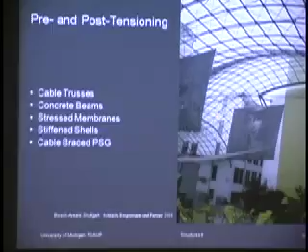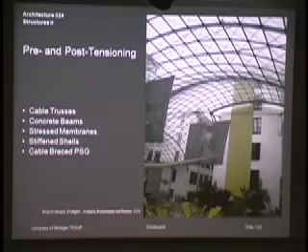This is the Bosch Areal in Stuttgart. The Areal is actually the buildings around it, which was Bosch's first headquarters, first workshop, and now it's kind of swanky apartment buildings, I think. But this thing here, which I've got a couple of slides of later, is stiffened by these spokes, these tensions - it's being pulled in tension here downward. It's a compression structure basically, but it's being stiffened by being pulled into additional compression.

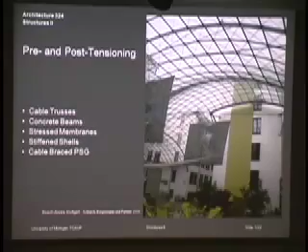Interestingly enough. Anyway, we'll talk about that in the course of things, but first let's look at cable trusses.

And you can see—here, turn the lights back on. We will demonstrate here. I mean, you can pretty much imagine how it works, but we will show you if we can. Okay, you hold that. All right, got that one, got this one. This is the concept right here, which we will now lift free of the chair.

If you have that thing, and the beam would deflect under whatever loading's on it, you can counteract that load by putting a support. It's kind of like a flying mast or something, a support in the middle, and you can tension this cable.

See, I am tensioning it. Whoa, that's a bit overdone. But you can see, I can bring it dead level if I want, or you can balance it so that there's no moment in the center.

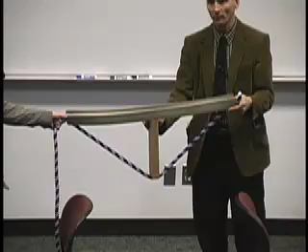Essentially, this becomes a support out in the middle, but it's a support held up by the cable, which then again ties back into the beam. Now, this would normally attach to the beam. So by doing this, it's pulling back—this force in the cable is held by the beam itself.

It's not like it's another thing out here. I guess you could do it that way, but that's not how it's done—it's held by the beam. So that means the beam has some flexure in it. It also has this axial force from this cable, because the cable is pulling on it.

And where that attaches—the way we've got it now, it attaches pretty much in the center. In this example he's got, it attaches in the center, but it might not attach in the center. It could attach, say, at the bottom edge.

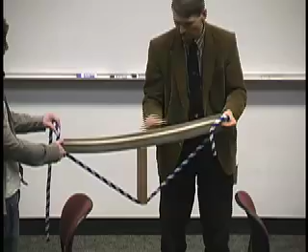If we had—whoa, this would be tricky. Let's see if we can flip it up. Hey, come up here, Ryan. Flip the beam up on edge on the strong axis. Rotate. There we go, great. Okay, now say it were like that.

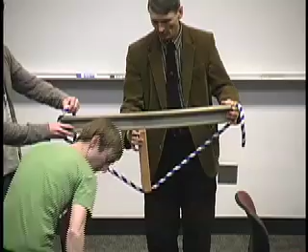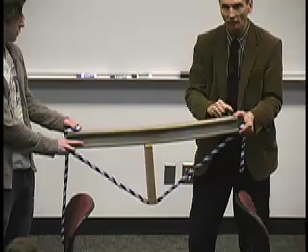Now, this is a little trickier, isn't it? I knew there was a reason I did it the other way. If you attached it at the bottom edge here, you'd not be at the centroid of this beam, which would mean just the cable itself would be putting a twist onto the end of it.

It would be just like what we looked at with the eccentric load business—it would be an eccentric load. That cable would be loading it like this, and as you tension it, it would be putting a bow into it, so you could get an extra effect like that.

If you're trying to bow it upward against gravity, you could attach it to the bottom edge, not at the centroid, and that would bow it up. Plus you've got the piece in the middle pushing it up, and then you also have the axial force acting on these forces.

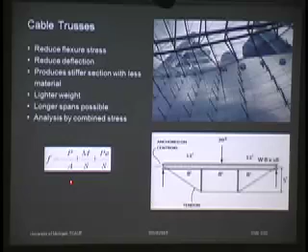These forces add up with a superposition equation like this, similar to what we did before, which is why this is all combined in the same chapter. You've got an axial component, P over A, negative for compression. Then you've got the flexure component, which might come from something like that, or a point load. Then you've also got an eccentricity.

Here this would be zero because it's attached at the centroid, but if there were an eccentric attachment, then you'd have an additional moment for that. So you add these stresses up, and you can find the total stress.

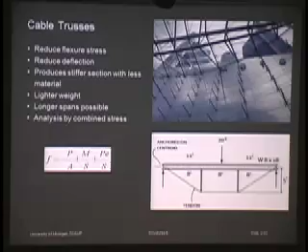But the interesting part of the whole system is that you can use this to balance. You can either balance out the deflections, have zero deflection up here, or have a zero moment up there, depending how you want to solve it, by tensioning that cable. Let's see, there's probably an example of this with a few numbers.

This is an example out of the book, that same one where you've got a beam. It's got a couple of verticals, the cable on the bottom. This one's attached at the centroidal axis, so it doesn't have any eccentric moment.

The idea is you have a moment caused by the load, and you're going to balance it by these sticks, so that at the center line it'll have zero moment. Now, if there were just one stick, a one-point load and one stick against it, you could imagine bringing the whole beam to zero moment, if you weren't worried about the dead load.

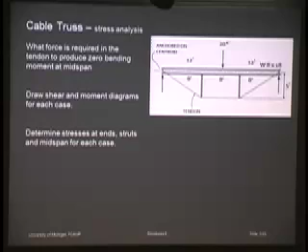But in this case that's not quite going to work, because you have two supports. So depending on what the cable force is here, you can do different things. You could get the moment to be zero at this point or this point, or you could try to get zero deflection. You could solve it for different criteria just by how much you pull on that cable. The question then is how much do you want to pull on the cable, and in this case, I think the problem works through with zero moment.

So if you're after balancing this moment, first you want to figure out what the moment is. You look at a free body diagram just of the beam itself with the cable removed, no cable on there. That shows you, okay, PL over 4, 120 kip feet.

That's what the moment is from this load. Now you want to balance that center line moment with these forces. With it, you've got a cable force and also these guys. Well, this axial force is just going to cancel out, and you've got these forces, which will be in the diagram something like that, acting on the beam. These are those little stanchions, and this is still the beam.

So what have we got? You've got to find this force first. This is the loading — you assume that's the loading and set it up. There's the moment equation for a third point loading, and you set it equal to this one, which was 120, so you want to balance it. This is at the center line — they're both at the center line. So I'm balancing this loading against that loading so that at the center the moments are balanced.

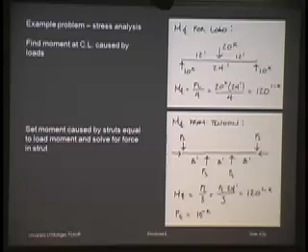This one's 120, going, this would actually be 120 negative, and this is 120 positive, so they add up to zero. If you do that, the only unknown here is this PS, and you can solve that — it comes out as 15. So now you know what the force is. You still don't know what the force is in the cable, but at least you know the force in that little strut, which is a good start, because given that, you can go ahead and figure out the cable force.

You can set up a free body diagram. Here's a piece of the cable, half the cable. So it's got that. This is the little stanchion we just had. There's the 15 kips that we just figured out. So that goes on there.

That would have to balance this one. Those are the only two verticals, right? And these two are the horizontals. So these two have to be the same. Then once you get this one is 15, you can look at this ratio, the slope of the cable.

The cable is treated just like a two-force member, just like way back when we did trusses, were two-force members. There's no moment in them. So since there's no moment, that means the vectors have to add up to a resultant that's exactly in the line of this cable. You can't have it any other way, it's impossible, we talked about this before.

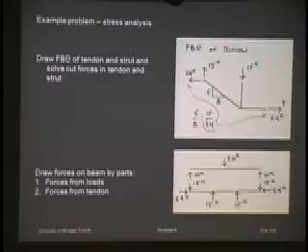Hold that. This is always a little bit, okay, I'm pulling in the direction of my arm. See? All right. My arm is like this. Now, if I tried to pull this way, the cable follows it. Okay, and I go this way. See, the cable is only going to go in the direction I pull it, whatever direction I pull it. It's not like I pull this way and the cable goes down there.

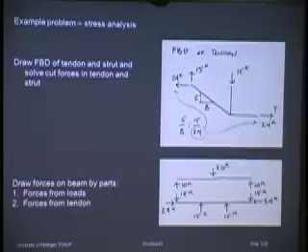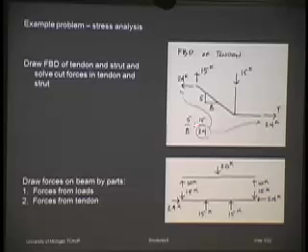No. Anyway, so the sum of these forces has to be exactly in line with that cable. So if this one's 15, and that's proportional to the short edge. This is short and long, so 15 is to 5 -- it's written backwards, 15 is to 5, it's 8 is to 24. So there's the 24. This is 3 times, this is 3 times. So there's the 24, there's the 24 there, and it's also 24 over there.

So now you've got the cable solved. Now you know what this force is in the cable, this horizontal and the vertical. Now you can go back and in this diagram, see we'd left that off, now we can put it on there. So there's the 24. This is the 15 from up here. These are both 15. There's 24.

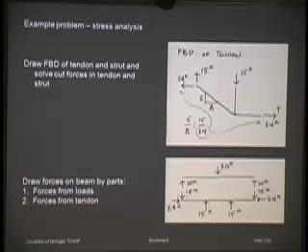Now this is without the cable, right? This is the beam, and this is the beam with the cable. So you sum these two together, and you've got the entire picture, the whole system. So by superposition, you just add those up. You end up with that then. So this is the free body of the beam, the forces on that beam.

Once you have this diagram, you could go ahead and construct a shear and moment diagram just for fun, right? You might as well. This has no effect at all, these 24, on either shear or moment. This is just an axial force. This one has no effect on it. See? It doesn't affect it. How's that supposed to affect it? No, it doesn't affect it.

Sorry, only this one. You start here, 5, goes down 5, goes across nothing, up 15, up, over, down from 20, over, up 15, over, down. So that gives you that. And then you get the areas of those, and you can plot your moment diagram.

That's exactly what we expected, right? That was the whole point. We were trying to get 0 moment. You haven't forgotten the point, I hope. The point was to get 0 moment in the center, but look at this, it didn't get 0 moment over here. Well, shoot. But it's not 120 either. If I hadn't had that cable on there at all, I would have come to 120 in the center, right? Remember? It was 120. So the cable did a lot. I mean, I did get down to 0. You could think, hey, what if you pulled the cable a little bit more?

If I pulled the cable a little bit more... oh, I guess that'd be a bad idea. I think I've got to pull the cable a little bit. If I pull it more, this will go down. But if I pull it less—okay, I pulled it too much already. I let out a little slack. Then I'm going to start getting the moment back in here, and this diagram will go up, I think.

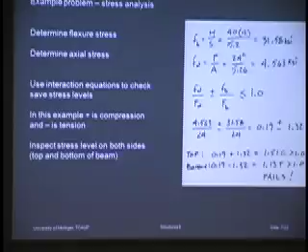This is supposed to take tension—what does it say here? Positive is compression, positive is compression. Okay, this is positive, this is the axial force in compression. Then it's plus or minus. The top edge, positive—that one should be negative, because it's been...

Oh man, yeah, there's things you do sometimes. I was thinking like this, but it's not like that. We crank those things up so it's actually bowing like this, right? With those 40s in the middle, it was dead—it didn't bend, but it has two little bumps there. Put your hand in the middle—it goes like that. Okay.

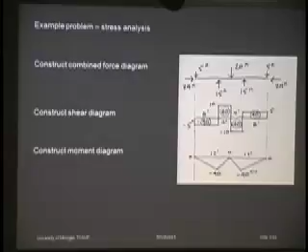So actually, this is... see, that's a... I can't go backwards. It's terrible—oh, there it is. These are negative moments. Go on. These are negative moments. If they're negative moments, that means the thing's bowing up, right? It's bowing up, if it's bowing up, it's tension on the top.

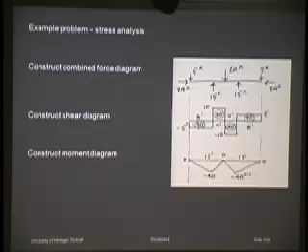Man, okay, well there's another... well, okay, so that's supposed to be a negative. This one on the bottom, it should be in compression, so this one should be a positive. Oh, we'll see, maybe it does work out then. No, it still doesn't work out—these numbers are just flipped. So it fails any case. Yeah, those numbers are backwards. Well, okay, one point off for me.

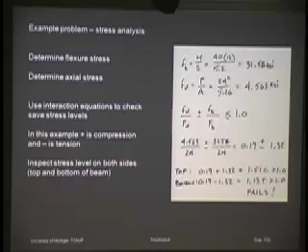All right, so moving right along. The other one counts two points. Oh shoot, yeah, it says two parts. All right, pre-stressed concrete. Well, let's look at this for a second, see if we get this right.

Here is a pre-stressed tendon, probably in the bottom. Usually they're not just straight like that—usually they have a nice parabolic curve in a sleeve or something because they're responding to the shape of the moment. Or in the book, I think he does some that are like a V to a point in the middle—yeah, maybe that might be easier to manufacture like that. At any rate, this one's just straight across at the bottom. If I pull that, if I put a tension on it, and you'd want to do this—I mean, here's a scenario.

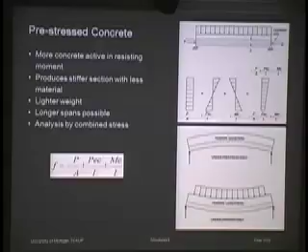You have a mold, a form, and you put this cable in there, and you stretch the bejesus out of it. Then you cast the concrete. But you're still stretching it, don't let go of it. Now you cast the concrete, you still hold it, and eventually the concrete cures and gets hard. Then you let go of it.

Now when you let go of it, the concrete's going to hold it, and it's going to try to contract because it's like a rubber band. It's snapping back, and that's going to pull the concrete with it. So it puts the bottom of the concrete like it's pulling it from the bottom edge, it'll pull it tight like that. So it's going to pull the concrete beam like that.

So initially, in the mold, you should expect it to be, they probably do produce them with a slight camber, so it actually bows up even. But there would definitely be that moment on it, the dead loads on it, of course, but this would tend to arch it up.

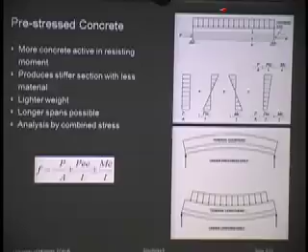Well, let's see, does this make any sense? In addition to that, that's the PE part of it. That's this part, okay. There's also the compression from this part, and then there's a load on it, no doubt, in the opposite direction. So this is arching up.

See if we got the sign right on this. We can blame Shiga if this is wrong. This is compression, right? So this is right. Hey Shiga, good job. This is correct. This is from this moment going upward.

This is also compression on the bottom. So it's compression on the bottom from the axial force. It's compression on the bottom from the arching up, the PE moment. This load up here produces this diagram. This is the moment going downward, so it's sagging like that. So that is tension on the bottom. So you add up compression, compression, and tension, and you end up with something like that.

So it's in compression on the bottom, which would be kind of a nice thing for concrete, don't you think? I mean, if you were concrete, wouldn't you rather be in compression? And here it adds up compression, some tension, and more compression. So hopefully this adds up to compression up here as well. Looks like it probably would. These two would cancel out maybe.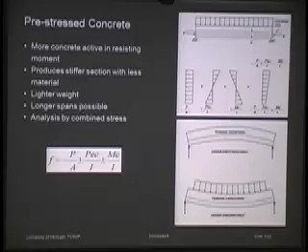And the idea is you can put enough pretension in there that it would reduce the deflection. As a result, with pre-stress beams, you can make them lighter because you're bowing it upward to begin with. It doesn't have to be as heavy to resist the downward moment. Does that make sense? If the beam starts out already bowed up like this, and then I put a load on it, it just kind of comes out level, then I'm kind of back to zero.

So it's almost like I only have to balance this upward and the downward part of it. The result is you can have a lighter section. If you didn't have that pre-stress at all, then you've just got to carry it with the strength of the steel, and the steel would have to start straining before it would pick up load, so it would sag more. So the pre-stressed beams are usually lighter sections.

They're a little bit thinner, less deep, and you design it to meet the deflection criteria in any case, but because they have the pre-stress, they can meet the deflection criteria with less material. So that's the advantage of those. What else would be an advantage?

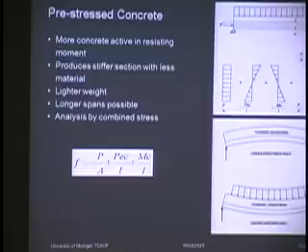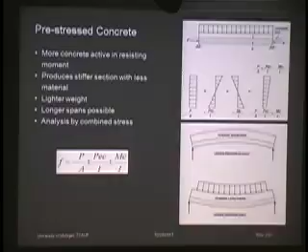Normally with pre-stress, they're factory cast, not cast on site. So the curing is much more tightly controlled - they can be steam cured, for instance. Because you're doing it in a factory setting, you can have a much lower water cement ratio and still be able to place it, so you get a higher strength concrete.

In fact, you almost have to have higher strength concrete to take advantage of the pre-stress. You know concrete does creep - do you know what creep is? It'll shrink under load. It's not exactly shrinking, it shies away from the load, is what creep would be. If I put a load on it, over time, over a long time, it goes like that.

That follows the grade of the concrete. If you have a very low grade concrete, like 2,000 or 3,000 psi, it creeps more. If you have a higher grade concrete, it's stiffer to begin with, denser, and it creeps less. Because if you put the pre-stress on it, or post-tensioning, either one, and the concrete creeps, it relieves the tensioning. Suddenly your bars could go slack if the concrete shrinks enough - that wouldn't be too good. So usually with pre-stress you need a very high strength concrete.

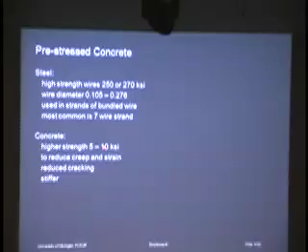Does it say how much? No, it doesn't - oh yeah, it does. Higher strength concrete, 5 to 10 KSI, to reduce the creep. Oh, it does say all this - reduces the creep, cracking, makes it stiffer.

The pre-stressing tendons are super strong. We were looking before - mild steel is 36 KSI, normal reinforcing bars are 60 or 70 KSI. These are 250 or 270 KSI, so they are super stiff bars. You cannot bend them at all.

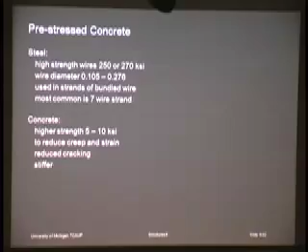You've seen these probably - they're used sometimes to guy telephone poles. The 7-wire strands are a very coarse-looking cable, not a nice woven cable - they're just 7 wires generally twisted together. If you pick one up, say you cut one out of a telephone pole guy, you'll find it's very stiff. It's not like a cable you can just bend around. They are very, very stiff.

They're stiff, of course they're stiff, because, well, not just that, but they are stiff. And in fact they're also very brittle - you can shatter them, I guess, if you bang on them with a hammer or something.

Okay, well, that's enough said about that, don't you think?

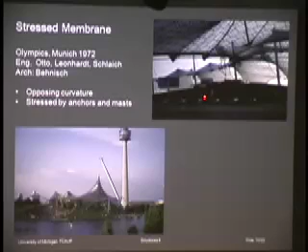Now I thought I'd give you a couple examples of applications of this from some slides - these were old slides I did years ago, not in '72, but not too long after, actually. This is the stadium in Munich, the one that Allianz replaced.

But this was done for the Olympics, and this is a continuous cable that runs along here. Oh, you can't see too well - come on, there we go. This is a continuous cable, and the masts are set behind it that hold it up, and to get the curvature in the net they had to have a point up here. You can see these are flying masts, exactly what we did there, and they run off of the cables. There's a cable that runs down under that saddle and back up.

Let me see if I can find one. They go back up - I think they go up and down again or something, I forget. Anyway, but you don't have to have any masts coming down inside - then it's all free space. So these you can see are tensioned with cables.

This structure was the second big cable net that Otto did. He did the one in Montreal first, which, if you look at pictures of it, is a much lighter weight structure. The reason is the post-tensioning in the Montreal structure was much, much lower, and it was allowed to flex. It was deliberately not designed for snow loads - it was just going to be a temporary, it was a summer expo. And this structure, on the other hand, was indeed designed to carry the snow loads in München.

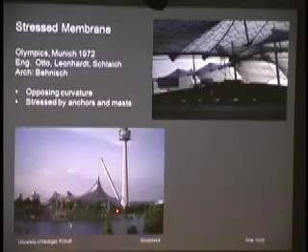But it does have a lot of pre-stress, and you can see it in the details, the size of the cables. I guess it's pretty massive. Where you really see it is down on the ground. Maybe I got some pictures of the ground.

And it's also like an iceberg. I mean, underground there's a bigger piece of it. But the tensioning in those cables is enormous, that wraps around like that to hold it stiff.

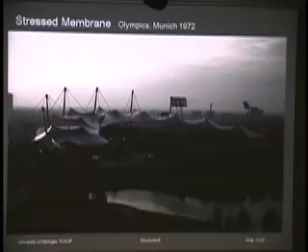Okay, anyway, so what else can we look at? Oh, a couple other quick examples maybe. This is a small glass arch that a friend of mine, Mathias Kutterer, built. I kind of helped him. See, I took these pictures, everybody else was lifting. I said wait, I'll take your picture. Hold that. So they're all holding it.

But the idea is it's got a cable under it. This is similar to those other ones we looked at earlier. And as you pull this in tension, it puts the arch in additional compression, and that stiffens it. I don't really have a good way I could show you that.

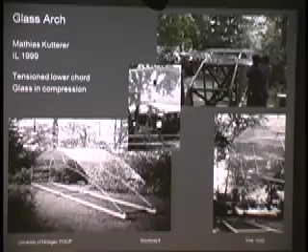But the ideal example, the classic, is a bicycle wheel with spokes. If you took all the spokes out, what would happen? You'd fall on the ground. Well, your wheel would also be kind of wobbly, it wouldn't be stiff. You wouldn't have a hub sitting there, but it would not be as stiff. The spokes pulling on that arch actually stiffen the arch of it, in addition to, I guess, placing the hub in the center. But they do stiffen it.

Maybe that isn't a very good example. Shoot. Well, think of an egg, and inside the egg there's this little chicken. He's pulling down on it. Also not a very good example. I'll have to think of a better example.

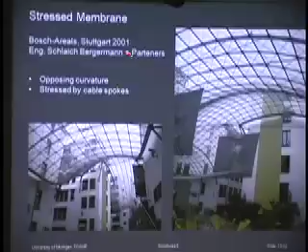At any rate, pulling that and putting this arch into compression does stiffen it, and that's used very commonly. This is another example where it's used. This is the Bosch-Areal that Schlaich did, and this is a typical Schlaich. Schlaich has done several of these grid shells, and they're very thin, either aluminum or steel mullions.

If it were just the mullions up there, it would not be stiff enough. The thing would be too flexible. The uneven loading would cause it to collapse and buckle. But what they've done is they've stiffened it in two ways.

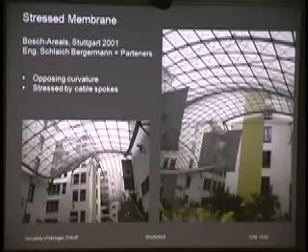What you see with the fine lines there, that's a net. It's a complete cable net that, without any tensioning, hangs naturally about a foot below the other shell. So you've got a curved shell here and a mirrored cable net shell below it, about a foot away.

And then at every node, at every one of these intersections, you can't see it on this slide, but at every one of those, there's a piece that comes down and grabs the cable, and they screw it up. They screw the whole cable net up so that it rises until it touches the compression net. Well, think what that does.

If the ends are all fixed, you're stretching the cable. As you push that cable net up, you're stretching it, so you're putting it into tension. And when you release, you're attaching it to the grid shell. So in essence, the tension in the net translates into additional compression on the grid shell that has to hold it. So you're stiffening the whole grid shell by putting this additional compression on it.

It's really an ingenious idea, one of the more clever things. This adds additional stiffness, so this is like a bicycle wheel spoke, like a hub, and these reach up and catch a particular arch and stiffen that arch.

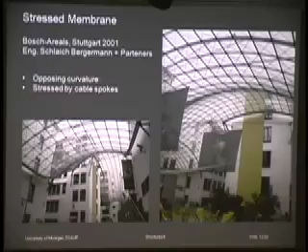What else? Oh, and here's our own in Detroit. This was SOM's version, and here you can see the fish belly trusses. The concept here, this is a huge truss up above that's held up. There's a piece here and a piece at the other end that hold up this big truss, and then the entire facade is just hung from that. And you can see what it is in a true point support.

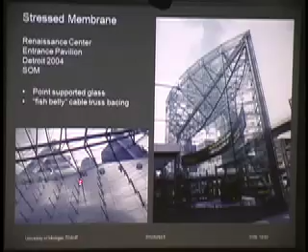This one actually they fudge a little bit because they've got a cable that runs down right there. But when Peter Rice did his early ones, like the one in La Villette, those little cube buildings, there was no second cable. You just had the glass tied at these points, and it hung like a chain. From those points, the glass was the chain link, and then there was another fastening down here, and all these plates of glass are just chained together with those little spider pieces.

Now, in this one, they do have an additional, it's almost like a safety backup cable that runs the length of it, too, that stiffens it. But there's no mullion in it that supports the glass at all. The glass, and this is why they call it structural glass, because the glass is hanging in tension structurally. If you break one of those pieces of glass, you don't just get a hole in the glass, you get the thing go, it doesn't completely fall.

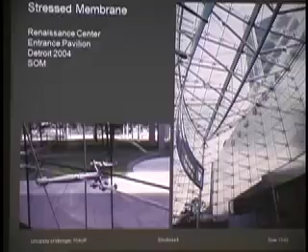Actually, when Rice did his for La Villette, they tested it. They set the thing up and they broke one panel, and the idea was it could deform massively but not collapse, and that's what it did, pretty much. Anyway, here are a couple other pictures of this, a close-up of that cable detail and the arch.

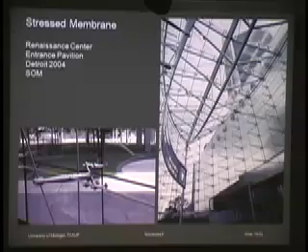Now, we got just 3 minutes. I don't know if I can pull this off in 3 minutes. Turn the light on. But I will give you a little reading here, which you have to listen to carefully. It's a little bit long, it'll probably take 5 minutes. Sorry, oh man, okay, so we're going to go 3 minutes over, but I'll read fast.

This is a description of a dilemma of structural optimization, and it's rather cleverly written, I think. And the dilemma is, in any structural system, normally there's a weak link, right? You find what piece is going to fail, and that determines the whole thing. So what if you fix that and then you go on? Then there's some other weak link, but you could fix them all, and that's kind of what this is about. So this was by Oliver Wendell Holmes, the deacon's masterpiece.

Oh gosh, I'm going hoarse already, I haven't even started. Have you heard of the wonderful one-horse shay, that was built in such a logical way that it ran for a hundred years to the day, and then of a sudden it—ah, but stay, I'll tell you what happened without delay—scaring the parson into fits, frightening the people out of their wits. Have you ever heard of that, I say? Probably not. 1755, Georgius Secundus was then alive, snuffy old drone from the German hive—I don't know what they mean by that—that was the year when Lisbon town saw the earth open up and gulp her down, and Braddock's army was done so brown, left without a scalp to its crown. Whoa. It was on the terrible earthquake day that the deacon finished his one-horse shay.